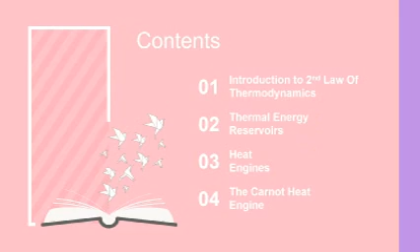Okay, we started with introduction to second law of thermodynamics. Energy is a conserved property, and no process is known to have taken place in violation of the first law of thermodynamics. A process must satisfy the first law to occur, but satisfying the first law alone does not ensure that the process will actually take place.

For example, a cup of hot coffee does not get hotter in a cooler room. A cup of hot coffee left in a cooler room eventually cools off. This process satisfies the first law of thermodynamics since the amount of energy lost by the coffee is equal to the amount gained by the surrounding air. The reverse process, the hot coffee getting even hotter in a cooler room as a result of heat transfer from the room air, never takes place, yet doing so would not violate the first law as long as the amount of energy lost by the air is equal to the amount gained by the coffee.

Second example: transferring heat to a wire will not generate electricity. Consider the heating of a room by the passage of electric current through a resistor. The first law dictates that the amount of electric energy supplied to the resistance wire be equal to the amount of energy transferred to the room air as heat. Now, let us attempt to reverse this process. Transferring some heat to the wires does not cause an equivalent amount of electricity to be generated in the wires.

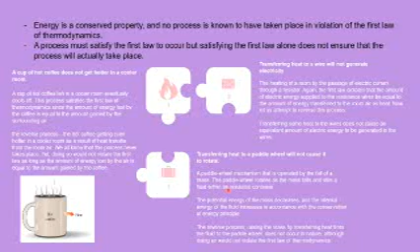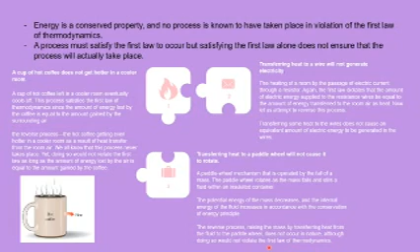The third example is transferring heat to a paddle wheel will not cause it to rotate. Consider a paddle wheel mechanism that is operated by the fall of a mass. The paddle wheel rotates as the mass falls and stirs a fluid within an insulated container. The potential energy of the mass decreases and the internal energy of the fluid increases, in accordance with the conservation of energy principle. The reverse process, raising the mass by transferring heat from the fluid to the paddle, does not occur in nature, although doing so would not violate the first law of thermodynamics.

From those examples, we can conclude that a process proceeds in a certain direction and not in reverse direction. The first law places no restriction on the direction of a process, but satisfying the first law does not ensure that the process can actually occur. The inadequacy of the first law to identify whether a process can take place is remedied by introducing another general principle, the second law of thermodynamics. The reverse processes discussed above violate the second law of thermodynamics. This violation is easily detected with the help of a property called entropy. A process cannot occur unless it satisfies both the first and the second law of thermodynamics.

The use of the second law of thermodynamics is not limited to identifying the direction of processes. The second law also asserts that energy has quality as well as quantity. The first law is concerned with the quantity of energy and transformation of energy from one form to another with no regard to its quality. Preserving the quality of energy is a major concern to engineers, and the second law provides the necessary means to determine the quality as well as the degree of degradation of energy during a process.

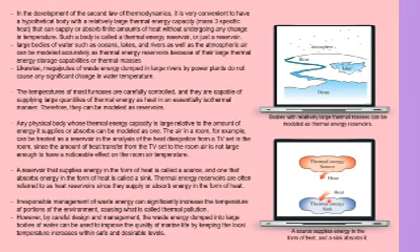Next, we talk about heat engines.

Work can be easily converted to other forms of energy, but converting other forms of energy to work is not that easy. The mechanical work done by the shaft is first converted to the internal energy of the water. This energy may then leave the water as heat.

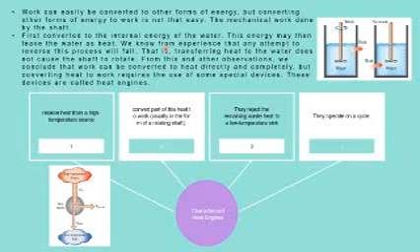We know from experience that any attempt to reverse the process will fail. That is, transferring heat to the water does not cause the shaft to rotate. From this and other observations, we conclude that work can be converted to heat directly and completely, but converting heat to work requires the use of some special device.

These devices are called heat engines. Heat engines are characterized first by receiving heat from a high temperature source, and then converting part of this heat to work, usually in the form of a rotating shaft. Third, they reject the remaining waste heat to a low temperature sink, and then they operate on a cycle.

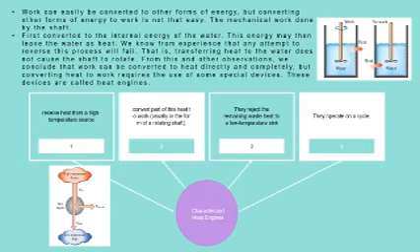This is the figure of heat engines. Heat engines and other cyclic devices usually involve a fluid to and from which heat is transferred while undergoing a cycle. This fluid is called the working fluid.

Engines that involve internal combustion, such as gas turbines and car engines, fall into this category. These devices operate in a mechanical cycle, but not in a thermodynamic cycle, since the working fluid, the combustion gases, does not undergo a complete cycle.

Instead of being cooled to the initial temperature, the exhaust gases are purged and replaced by a fresh air and fuel mixture at the end of the cycle. So some of the terms that we have to know are...

The amount of heat supplied to the steam in a boiler from a high temperature source is the heat in, and the amount of heat rejected from the steam in the condenser to a low temperature sink is the heat out, and the work out is the amount of work delivered by...

the steam as it expands in the turbine, and the work in is the amount of work required to compress water to boiler pressure. The net work output of this power plant is simply the difference between the total work output of the plant and the total work input.

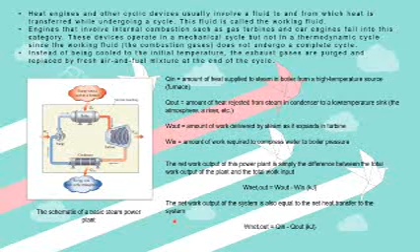This is the general equation, and the net work output of the system is also equal to the net heat transfer to the system.

Thermal efficiency: for heat engines, the desired output is the net work output, and the required input is the amount of heat supplied to the working fluid. Thermal efficiency is equal to net work output divided by total heat input.

Second, to bring uniformity to the treatment of heat engines, refrigerators, and heat pumps, we define two quantities: QH, the magnitude of heat transfer between the cyclic device and the high temperature medium, and QL, the magnitude of heat transfer between the cyclic device and the low temperature medium.

The net work output and thermal efficiency relation for any heat engine is W net out equals QH minus QL.

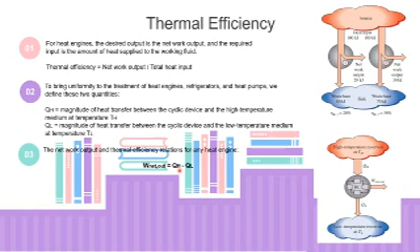And this is a Kelvin-Planck statement.

The heat engine cycle shown in this figure shows that even under ideal conditions, a heat engine must reject some heat to a low temperature reservoir in order to complete the cycle. No heat engine can convert all the heat it receives into useful work.

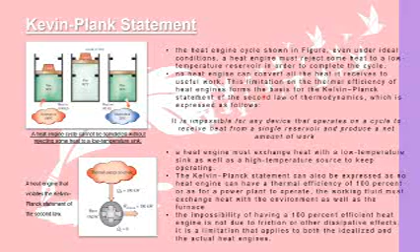This limitation on the thermal efficiency of heat engines forms the basis for the Kelvin-Planck statement of the second law of thermodynamics, which is expressed as follows: it is impossible for any device that operates on a cycle to receive heat from a single reservoir and produce a net amount of work.

A heat engine must exchange heat with a low temperature sink as well as a high temperature source to keep operating. The Kelvin-Planck statement can also be expressed as: no heat engine can have a thermal efficiency of 100%. For a power plant to operate, the working fluid must exchange heat with the environment as well as the furnace.

The impossibility of having a 100% efficient heat engine is not due to friction or other dissipative effects. It is a limitation that applies to both idealized and actual heat engines.

So this is the heat engine that violates the Kelvin-Planck statement of the second law.

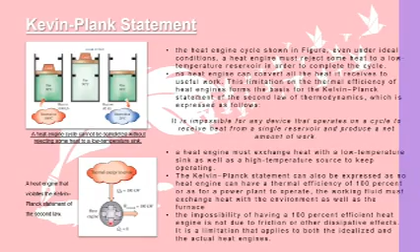We all know from experience that heat is transferred in the direction of decreasing temperature, that is, from high temperature mediums to low temperature ones. This heat transfer process occurs in nature without requiring any devices. The reverse process, however, cannot occur by itself. The transfer of heat from a low temperature medium to a high temperature one requires special devices called refrigerators.

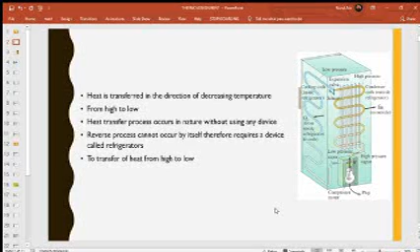Refrigerators, like heat engines, are cyclic devices. The working fluid used in the refrigeration cycle is called a refrigerant. The most frequently used refrigeration cycle is the vapor compression refrigeration cycle, which involves four main components: a compressor, a condenser, an expansion valve, and an evaporator.

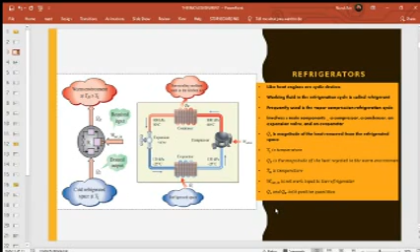The refrigerant enters the compressor as a vapor and is compressed to the condenser pressure. It leaves the compressor at a relatively high temperature and cools down as it flows through the coils of the condenser, rejecting heat to the surrounding medium. It then enters a capillary tube.

Its pressure and temperature drop drastically due to the throttling effect. The low temperature refrigerant then enters the evaporator, where it evaporates by absorbing heat from the refrigerated space. The cycle is completed as the refrigerant leaves the evaporator and re-enters the compressor.

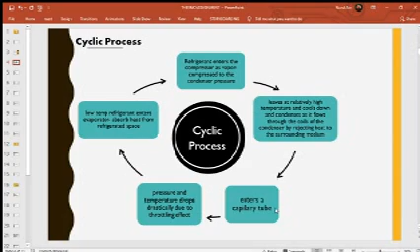Coefficient of performance: the objective of a refrigerator is to remove heat from a refrigerated space, requiring a work input of W net in. COPR equals desired output over required input.

By the conservation of energy principle for cyclic devices, W net in equals QH minus QL, so COPR equals QL over (QH minus QL), which equals 1 over (QH over QL minus 1).

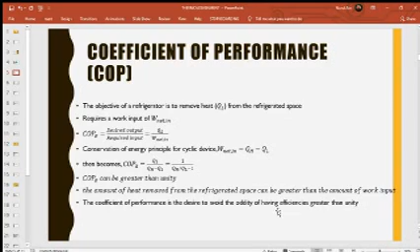COPR can be greater than unity — the amount of heat removed from the refrigerated space can be greater than the amount of work input. The coefficient of performance term is used to avoid the oddity of having efficiencies greater than unity.

Heat pumps: another device that transfers heat from a low temperature medium to a high temperature one is the heat pump. Refrigerators and heat pumps operate on the same cycle but differ in their objective. The objective of a refrigerator is to maintain the refrigerated space at a low temperature by removing heat from it. Discharging this heat to a higher temperature medium is merely a necessary part of the operation, not the purpose.

The objective of a heat pump, however, is to maintain a heated space at a high temperature. This is accomplished by absorbing heat from a low temperature source, such as well water or cold outside air in winter, and supplying this heat to a high temperature medium such as a house.

An ordinary refrigerator that is placed in the window of a house with its door open to the cold outside air in winter will function as a heat pump, since it will try to cool the outside by absorbing heat from it and rejecting this heat into the house through the coils behind it.

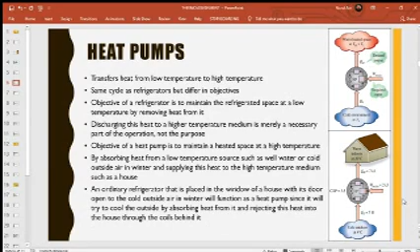Coefficient of performance for a heat pump equals desired output over required input, or COP heat pump equals QH over QH minus QL. Comparing this with the COP equation for refrigerators, we find COP heat pump equals COP refrigerator plus 1.

This implies that COP heat pump is always greater than unity, since COP refrigerator is a positive quantity. It can function as a resistance heater by supplying as much energy to the house as it consumes.

In reality, part of QH is lost to the outside air through piping and other devices, and the coefficient of performance of the heat pump may drop below unity when the temperature is too low.

Heat pumps that use the cold outside air are referred to as air source heat pumps. Heat pumps that use the ground as the heat source are called geothermal heat pumps or ground source heat pumps.

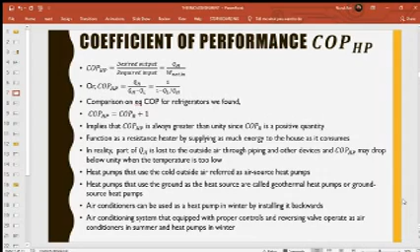Air conditioners can be used as a heat pump in winter by installing them backwards. Air conditioning systems equipped with proper controls and a reversing valve operate as air conditioners in summer and heat pumps in winter.

Performance of refrigerators, air conditioners, and heat pumps. The seasonal energy efficiency ratio (SEER) is the ratio of the total amount of heat removed by an air conditioner or heat pump during a normal cooling season, in BTU, to the total amount of electricity consumed in watt hours. It is a measure of the seasonal performance of cooling equipment.

Energy efficiency ratio (EER) is a measure of instantaneous energy efficiency, defined as the ratio of the rate of heat removal from a cooled space by the cooling equipment to the rate of electricity consumption in steady operation, both in units of BTU over watt hour.

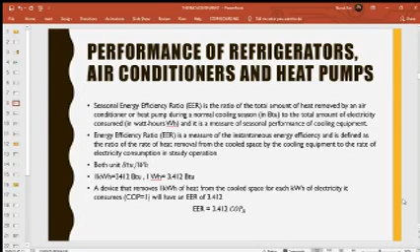1 kilowatt hour equals 3412 BTU, and 1 watt hour equals 3.412 BTU. A device that removes 1 kilowatt hour of heat from the cooled space for each kilowatt hour of electricity it consumes has a COP of 1, and will have an EER of 3.412.

This means EER equals 3.412 times the coefficient of performance of the refrigerator. This promotes the efficient use of energy. Air conditioners or heat pumps have SEER values from 13 to 21, corresponding to COP values of 3.8 to 6.2.

Best performance is achieved using units equipped with variable speed drives, also called inverters. Variable speed compressors and fans allow the unit to operate at maximum efficiency for varying cooling and heating needs and weather conditions. The EER or COP of a refrigerator decreases with decreasing refrigeration temperature.

COPs of refrigerators range from 2.6 to 3.0 for cutting and preparation rooms, 2.3 to 2.6 for meat, deli, dairy, and produce, 1.2 to 1.5 for frozen foods, and 1.0 to 1.2 for ice cream units.

It is good energy conservation practice to use separate refrigeration systems to meet different refrigeration needs.

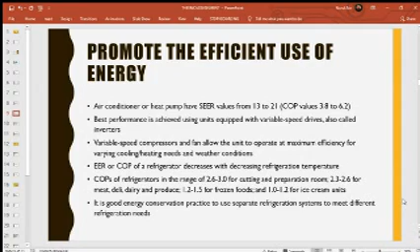The second law of thermodynamics, Clausius statement: it is impossible to construct a device that operates in a cycle and produces no effect other than the transfer of heat from a lower temperature body to a higher temperature body.

Simply stated, a refrigerator cannot operate unless its compressor is driven by an external power source, such as an electric motor. The net effect on the surroundings involves the consumption of some energy in the form of work to transfer heat from a colder body to a warmer one, leaving a trace in the surroundings and complying with the statement of the second law.

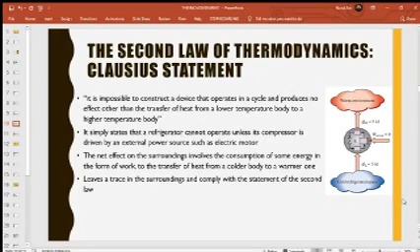Equivalence of two statements: any device that violates the Kelvin-Planck statement also violates the Clausius statement, and vice versa. The heat engine is assumed to have, in violation of the Kelvin-Planck statement, a thermal efficiency of 100%, and therefore converts all the heat it receives into work.

This work is now supplied to a refrigerator that removes heat in the amount of QL from the low temperature reservoir and rejects it, in the amount of QH plus QL, to the high temperature reservoir.

During this process, the high temperature reservoir receives a net amount of heat QL, the difference between QH plus QL and QH. Thus, the combination of these two devices transfers heat in an amount of QL from a cooler body to a warmer one without requiring any input from outside.

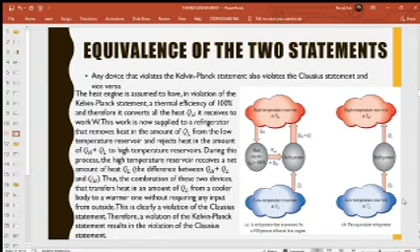This is clearly a violation of the Clausius statement. Therefore, a violation of the Kelvin-Planck statement results in a violation of the Clausius statement.

Section 6.5, perpetual motion machines. Perpetual motion machine 1 violates the first law by creating energy. Perpetual motion machine 2 violates the second law.

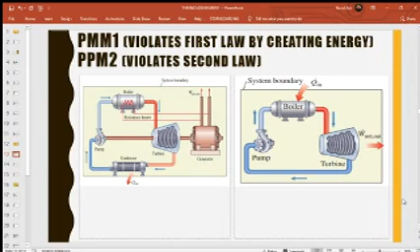It claims that once the system is started, this power plant will produce electricity indefinitely without requiring any energy input from the outside. The system enclosed by the shaded area is continuously supplying energy to the outside at a rate of Q out plus W net out without receiving any energy.

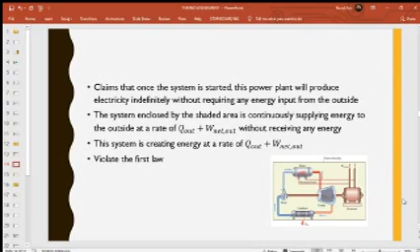This system is creating energy at a rate of Q out plus W net out, which violates the first law.

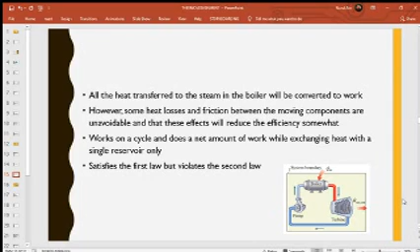All the heat transferred to the steam in the boiler will be converted to work. However, some heat losses and friction between moving components are unavoidable, and these effects will reduce the efficiency somewhat. A device that works on a cycle and does a net amount of work while exchanging heat with a single reservoir only satisfies the first law but violates the second law.

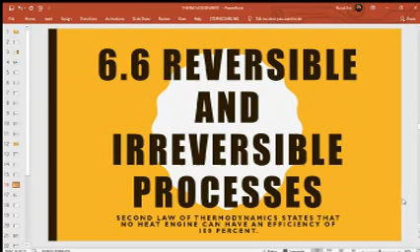6.6. Reversible and irreversible process. The second law of thermodynamics states that no heat engine can have an efficiency of 100%. A reversible process is defined as a process that can be reversed without leaving any trace on the surroundings.

Both the system and the surroundings are returned to their initial states at the end of the reverse process. The net heat and net work exchange between the system and the surroundings is zero from the original and reverse process. Reversible processes do not occur in nature.

Work-producing devices such as car engines and steam turbines deliver the most work, while work-consuming devices such as compressors and pumps consume the least work. The better the design, the lower the irreversibilities, and the higher the second law efficiency.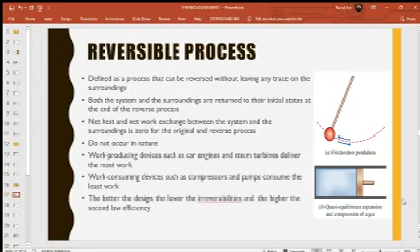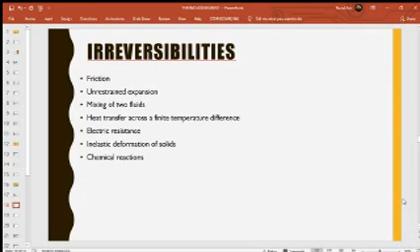Irreversibilities include friction, unrestrained expansion, mixing of two fluids, heat transfer across a finite temperature difference, electric resistance, inelastic deformation of solids, and chemical reaction.

One example is friction. Friction is a familiar form of irreversibility associated with bodies in motion. When two bodies in contact are forced to move relative to each other, friction that opposes the motion develops at the interface of these two bodies, and some work is needed to overcome this force.

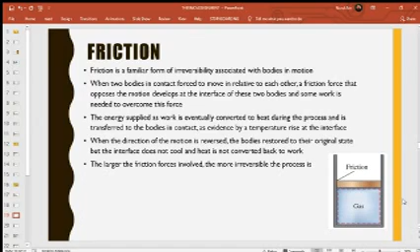The energy supplied as work is eventually converted to heat during the process and is transferred to the bodies in contact, as evidenced by a temperature rise at the interface. When the direction of motion is reversed, the body is restored to the original state, but the interface does not cool and heat is not converted back to work. The larger the friction forces involved, the more irreversible the process is.

The second example is unrestrained expansion of a gas. When the membrane is ruptured, the gas fills the entire tank. To restore the system to its original state, it must be compressed to its initial volume while transferring heat from the gas until it reaches its initial temperature.

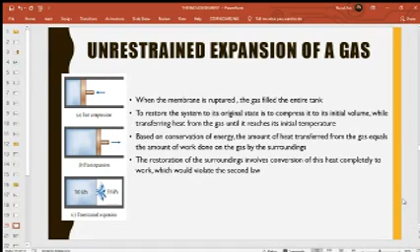Based on conservation of energy, the amount of heat transferred from the gas equals the amount of work done on the gas by the surroundings. The restoration of the surroundings involves conversion of this heat completely to work, which would violate the second law.

Internally and externally reversible processes. A process is called internally reversible if no irreversibility occurs within the boundaries of the system during the process. A system proceeds through a series of equilibrium states, and when the process is reversed, the system passes through exactly the same equilibrium states when returning to its initial state. The quasi-equilibrium process is an example of an internally reversible process.

A process is called externally reversible if no irreversibilities occur outside the system boundary during the process. Heat transfer between a reservoir and a system is an externally reversible process if the outer surface of the system is at the temperature of the reservoir.

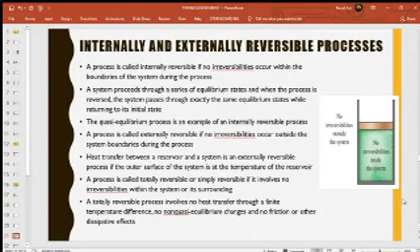A process is called totally reversible, or simply reversible, if it involves no irreversibilities within the system or its surroundings. A totally reversible process involves no heat transfer through a finite temperature difference, no non-quasi-equilibrium changes, and no friction or other dissipative effects.

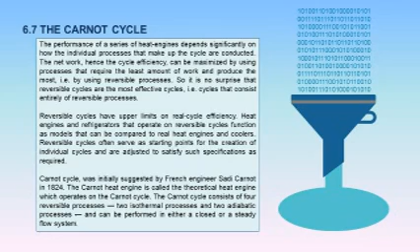The Carnot cycle consists of four reversible processes, which are two isothermal processes and two adiabatic processes, and can be performed in either a closed or a steady flow system.

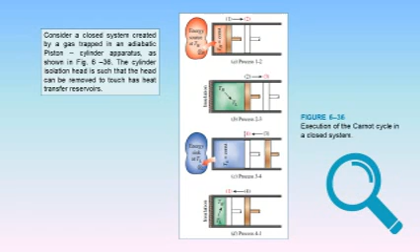Okay, so this is the example of the Carnot cycle, the execution of the Carnot cycle in a closed system. Consider a closed system created by a gas trapped in an adiabatic piston, which is the cylinder apparatus as shown in this figure. The cylinder isolation head is such that the head can be removed to touch heat transfer reservoirs. We're going to look through 4 reversible processes of the Carnot cycle.

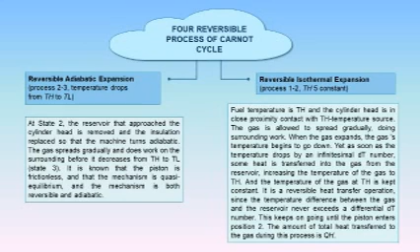The second one is the reversible isothermal expansion. The fuel temperature is TH and the cylinder head is in close proximity contact with the TH temperature source. The gas is allowed to expand gradually doing surrounding work. When the gas expands, the gas temperature begins to go down. The amount of total heat transferred to the gas during this process is called QH.

The third one is the reversible adiabatic compression, which is process 4 to 1. State 4 is such that the reservoir at low temperature is removed, the insulation on the cylinder head is placed back, the gas is reversibly compressed, and the gas returns to its initial state, which is state 1.

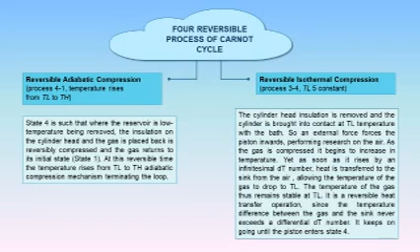And the last one is reversible isothermal compression, which is process 3 to 4. The cylinder head insulation is removed and the cylinder is brought into contact at TL temperature with the bath. An external force forces the piston inwards, performing work on the air. As the gas is compressed, it begins to increase in temperature. This keeps going until the piston enters state 4.

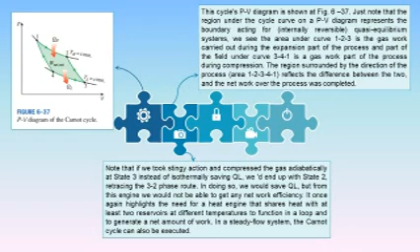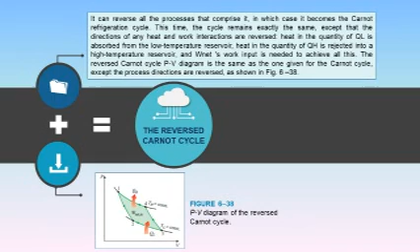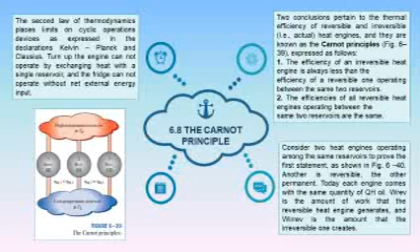And then we're going to look through 6.8, the Carnot principle. The conclusions pertain to the thermal efficiency of reversible and irreversible heat engines, and they are known as the Carnot principles, expressed as follows: number one, the efficiency of an irreversible heat engine is always less than the efficiency of a reversible one operating between the same two reservoirs. And the second one, the efficiencies of reversible heat engines operating between the same two reservoirs are the same. This is the figure of the Carnot cycle principle.

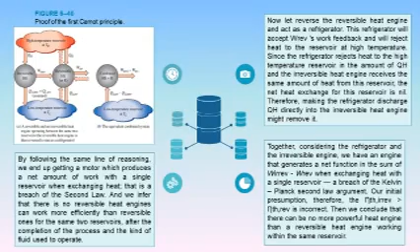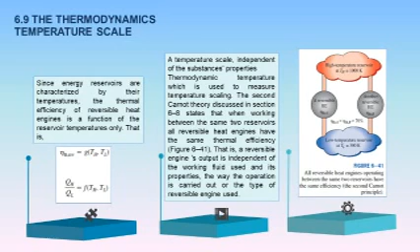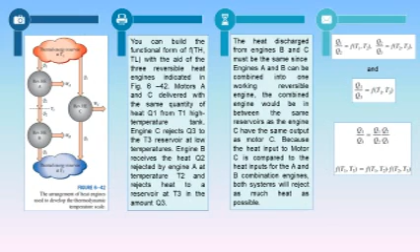Based on this figure, it is the arrangement of heat engines used to develop the thermodynamic temperature scale. And this is the formula we got from the steps and process. For figure 6.43, for reversible cycles, the heat transfer ratio QH over QL can be replaced by the absolute temperature ratio, which is TH over TL, based on the equation beside.

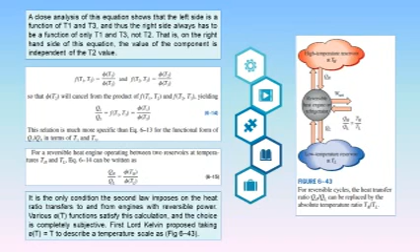Next is the Carnot heat engine. The hypothetical heat engine that operates on the reversible Carnot cycle is called the Carnot heat engine. The thermal efficiency of any heat engine, reversible or irreversible, is given by this equation: eta thermal equals 1 minus QL over QH. This is equation 1, where QH is the heat transferred to the heat engine from the high temperature reservoir at TH, and QL is the heat rejected to the low temperature reservoir.

The efficiency of a Carnot heat engine or any reversible heat engine becomes like this equation. It's actually the same, but we change Q to T for the efficiency. An actual heat engine cannot reach this maximum theoretical efficiency value because it is impossible to completely eliminate all the irreversibilities associated with the actual cycle.

Note that TL and TH in equation 1 are absolute temperature. Using degrees Celsius or Fahrenheit for temperature in this relation gives results grossly in error.

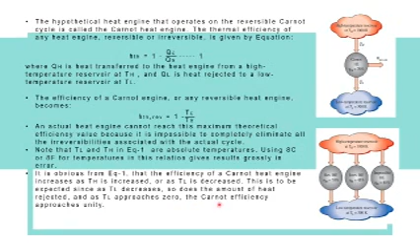It is obvious from equation 1 that the efficiency of a Carnot heat engine increases as TH is increased or as TL is decreased. This is expected since as TL decreases, so does the amount of heat rejected, and as TL approaches zero, the Carnot efficiency approaches unity.

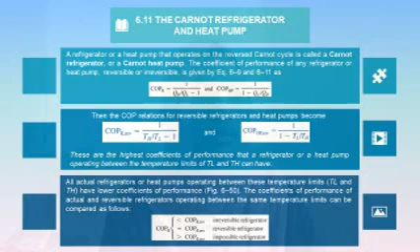Now we'll look through section 6.11, the Carnot refrigerator and heat pump. A refrigerator or heat pump that operates on the reverse Carnot cycle is called a Carnot refrigerator or Carnot heat pump. The coefficient of performance of any refrigerator or heat pump, reversible or irreversible, is given by this equation.

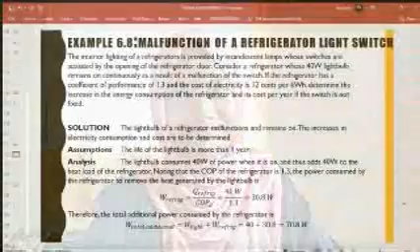Example 6.8: Malfunction of refrigerator light switch. The interior lighting of a refrigerator is provided by incandescent lamps whose switches are actuated by the opening of the refrigerator door. Consider a refrigerator whose 40-watt light bulb remains on continuously as a result of a malfunction of the switch.

If the refrigerator has a coefficient of performance of 1.3 and the cost of electricity is 12 cents per kilowatt hour, determine the increase in the energy consumption of the refrigerator and its cost per year if the switch is not fixed.

Solution: the light bulb of the refrigerator malfunctions and remains on. The increase in electricity consumption and cost are to be determined. Assumptions: the life of the light bulb is more than 1 year.

Analysis: the light bulb consumes 40 watts of power when it is on, and thus adds 40 watts to the heat load of the refrigerator. Noting that the COP of the refrigerator is 1.3, the power consumed by the refrigerator to remove the heat generated by the light bulb is W_refrigerator equals Q_refrigerator over COP_refrigerator, equals 40 watts over 1.3, which gives 30.8 watts.

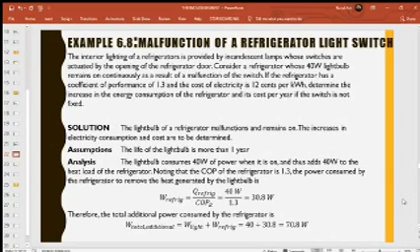Therefore, the total additional power consumed by the refrigerator is W_light plus W_refrigerator, equals 40 watts plus 30.8 watts, which gives 70.8 watts.

The total number of hours in a year is: annual hours equals 365 days per year times 24 hours per day, equals 8,760 hours per year. Assuming the refrigerator is opened 20 times a day for an average of 30 seconds, the light would normally be on for: normal operating hours equals 20 times per day times 30 seconds per time times 1 hour per 3,600 seconds times 365 days per year, giving 61 hours per year.

Then the additional hours the light remains on as a result of the malfunction becomes: additional operating hours equals annual hours minus normal operating hours, which is 8,760 minus 61, giving 8,699 hours per year.

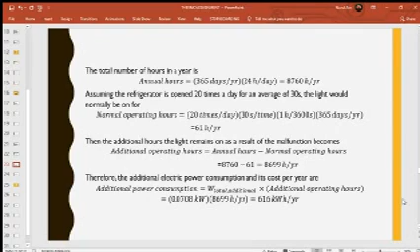Therefore, the additional electric power consumption and its cost per year are: additional power consumption equals W_total additional times additional operating hours, which is 0.0708 kilowatts times 8,699 hours per year, giving 616 kilowatt hours per year.

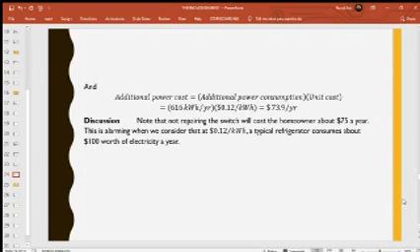And additional power cost, which is additional power consumption times unit cost, 616 kilowatt hours per year times $0.12 per kilowatt hour, gives $73.9 per year. Discussion: note that not repairing the switch will cost the homeowner about $75 a year. This is alarming when we consider that at $0.12 per kilowatt hour, a typical refrigerator consumes about $100 worth of electricity a year.

Summary: the second law of thermodynamics states that processes occur in a certain direction, not in any direction, and a process does not occur unless it satisfies both the first and second laws.

Bodies that can absorb or reject finite amounts of heat isothermally are called thermal energy reservoirs or heat reservoirs. Work can be converted to heat directly, but heat can be converted to work only by certain devices called heat engines.

Thermal efficiency of a heat engine is defined as W_net output over QH, equals 1 minus QL over QH.